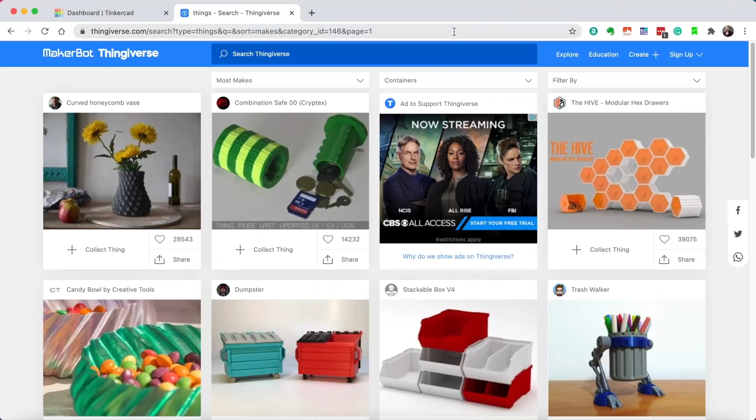If you go to the Thingiverse user interface, there is an item here that you can click on that will list categories. So I could go right to household, let's say to bathroom, and then I could find all sorts of accessories that I could 3D print for my bathroom. I could click on that again, and this time I could look at office organization.

And I could find accessories for those. But these are basically one size fits all. Whatever size the container is, that's the size I'm going to get. But there's another very powerful capability in Thingiverse.

I did a whole video on this last week that I'll link to above, so we won't go into a lot of detail here. But that is the ability to have customizable items. So if you go over to Explore and go to Customizable Things, you'll see that all the items listed here, let's look at this scoop, have a link called Open in Customizer.

Now, unfortunately, the customizer in Thingiverse doesn't work all the time. I don't know if it's a software bug, a resource issue, or a compute power issue, but it doesn't work all the time. But there's an alternative way to customize items.

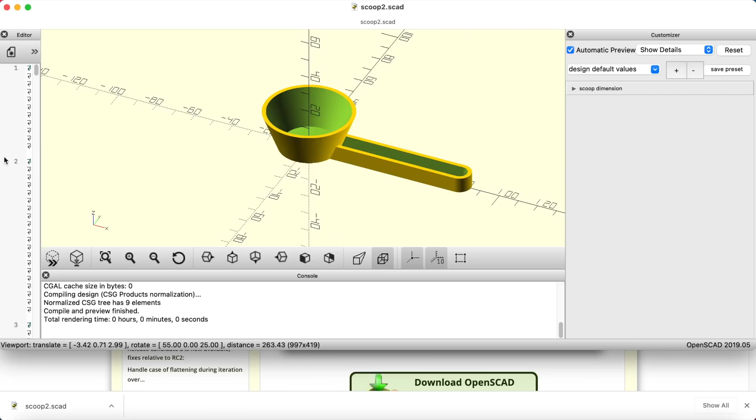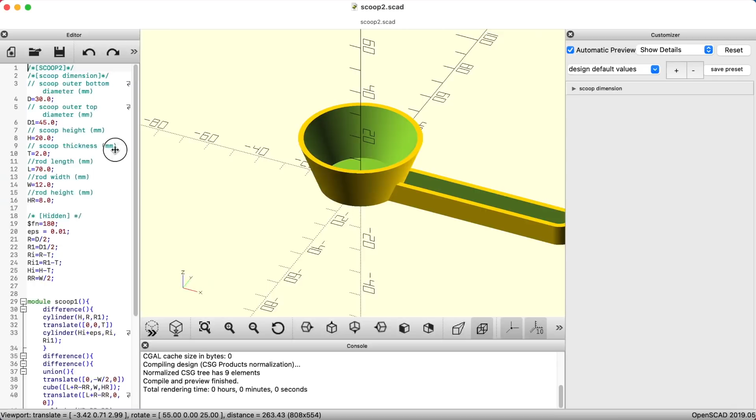Now, this is at first going to look a bit intimidating because SCAD is in fact a programming language. In the video I linked to before, I taught you all about this programming language. For today, all we want to do is drag this programming panel so it's closed, because we just want to look at this item here.

And we can scroll into the item with our scroll wheel on our mouse. We can use the left mouse button to rotate the item. We can use the right mouse button to move it around.

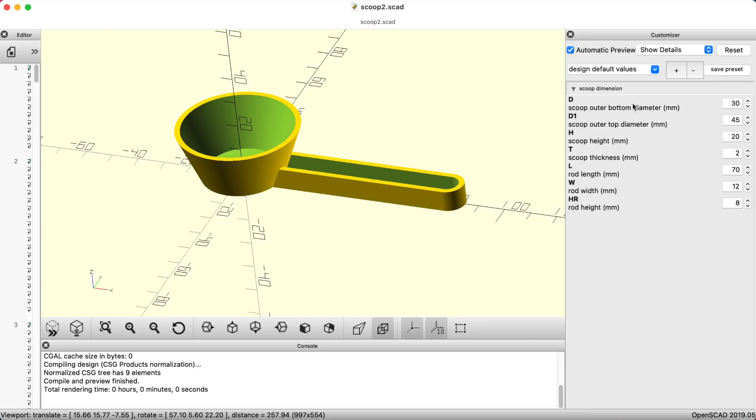Now you'll notice this panel over here on the right called Customizer. Well, that's how we can take and change our item. So I can make it bigger. I can change its shape. This is all customizable by changing these parameters.

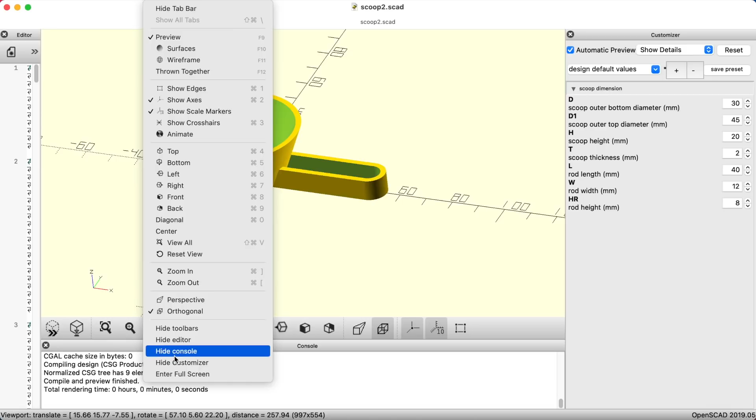Now, one important gotcha: you may not see that panel on the right-hand side when you first open up SCAD. And if you don't, click on the item called View in the SCAD menu and make sure Hide Customizer is not clicked. So if I hide it, it goes away. If I click on View and unhide it, it appears.

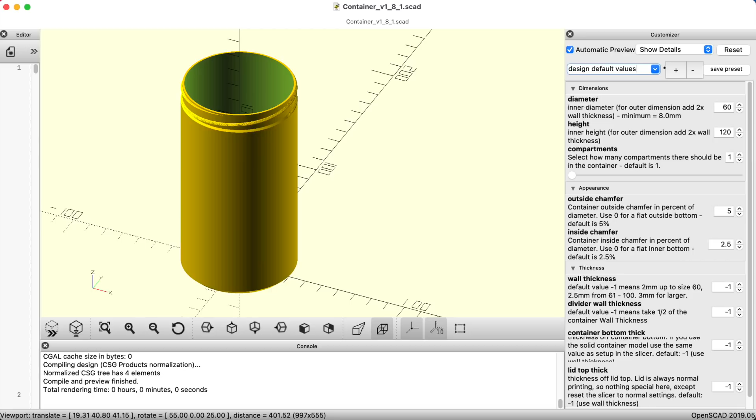And that's exactly how I produced this container. I started with a downloaded SCAD file and I customized it. That's how I produced this container. And you can learn how to do that in much more detail in the video I produced last week.

But now I'm going to show you how to design things from scratch yourself. Here is an example of a standard, more or less standard USB cable, a large USB connector on one end, a mini connector on the other. It might be a lightning connector on this end.

What I wanted to be able to do is put the large connector through this hole here. So it had to be large enough for the large connector, and then be able to wrap my cord around this cable wrap and put the small end through, and that would keep it from unwrapping. Very simple. And these happen to look sort of cool. They look like Batman weapons of some type.

So how did I produce this? Well, I produced it in TinkerCAD. So let's go to TinkerCAD together. Go to tinkercad.com, create an account, and then you want to click on Create New Design.

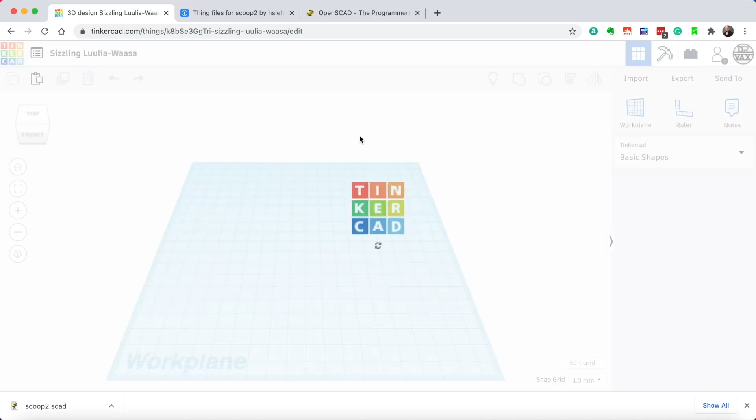Now, in order to design something, you have to think about what you want to design. You can get ideas by looking online, and if you were going to resell these, you'd have to worry about patents and things, but I think for personal use you're probably okay. So get some ideas by looking online, or just be creative, because it's so easy to try it over and over again. I'll show you an example of that in a minute.

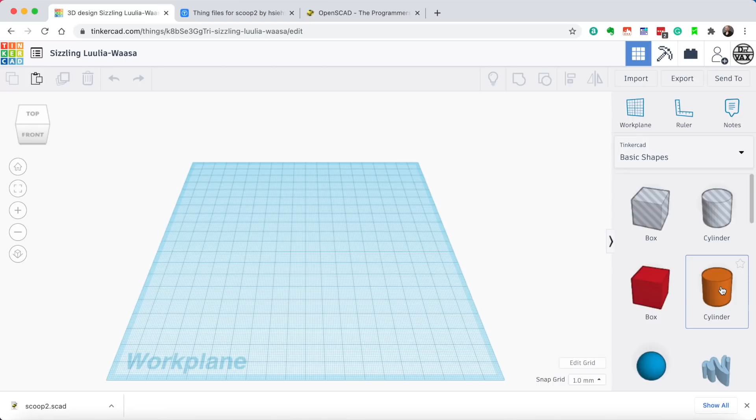So for this design, we're going to start with a cylinder. We're going to drag it over here. We're going to turn it into an oval. And then we might want to get a ruler out and get an idea of how big we want it. This happens to be about 75 millimeters, but get your ruler out and get a sense of what size you're looking for. So we're going to make this one a little bigger, 90 millimeters. And remember, we're going to need enough space for this connector.

And that connector is about almost 15 millimeters.

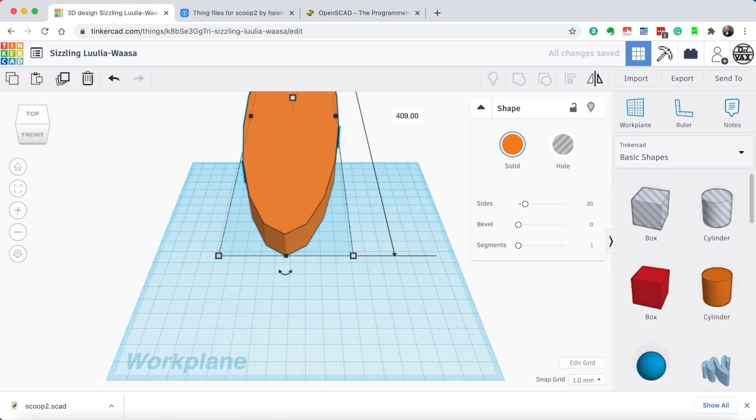So let's say we want the holes to be 20, we want some space around it. Let's make this other dimension 40 millimeters. Whoops, not 409, 40.

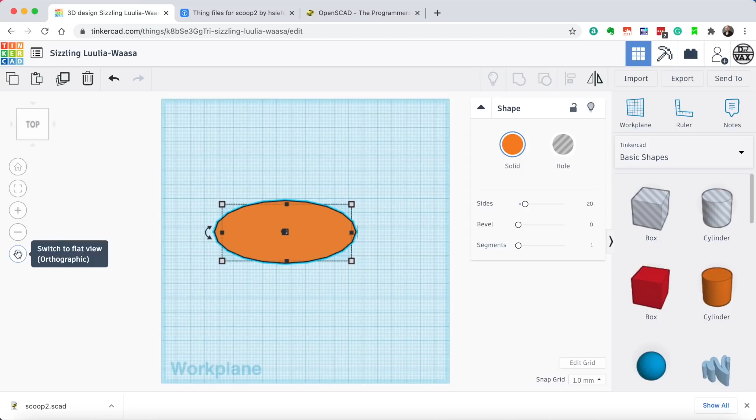Now I'm going to click on Top View. When you're looking at it from the top, or in fact from any view, you can look at it as a perspective view, a three-dimensional view, or what they call a flat view, which is actually an orthographic view. The orthographic views I find easier to draw with. You switch those by clicking here, so if it says switch to flat view, you want to click it.

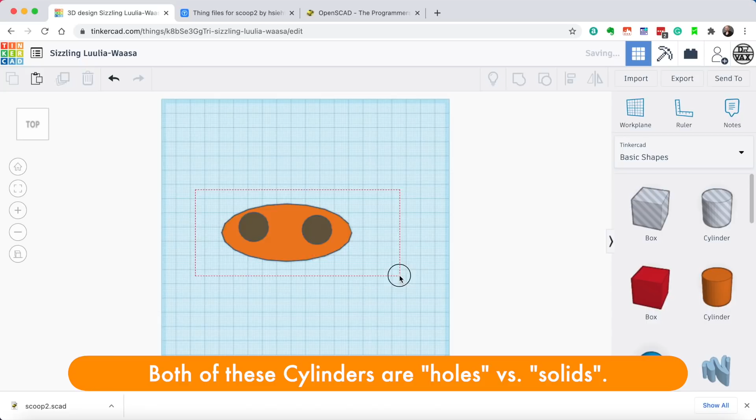Now I can just take another cylinder, which is a circle, and place it right there. I can take another cylinder and place it right there too. The next step is I'm going to select this whole item and click on this align button, then click this little button here to align them horizontally in the middle. So those are now aligned.

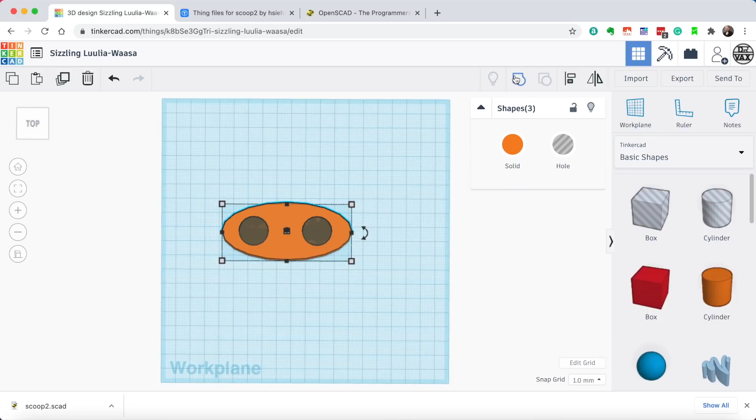Now if I take this and group it by clicking on the group icon here, it will cut those holes out.

Great. Now this would work, but I want to be able to hold on to the cable better, so I want some notches here. Now I could make those notches circular, or I could make those notches square. You can do it either way.

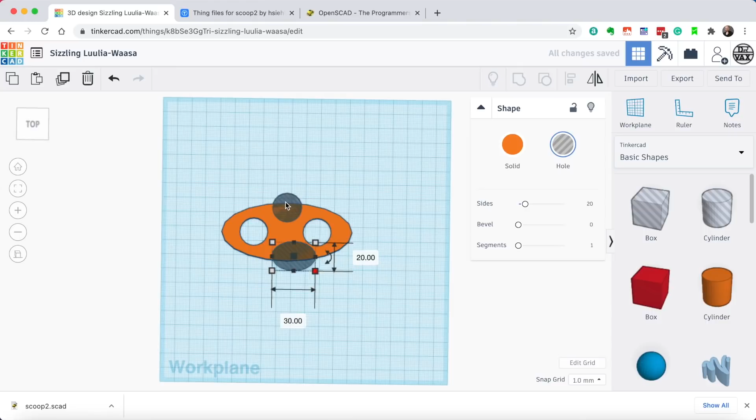We're going to make them circular, so we're going to drag a cylinder in here, and drag another cylinder in here. I'm going to make them a little bit bigger. We'll make that 30. We'll make this dimension 20.

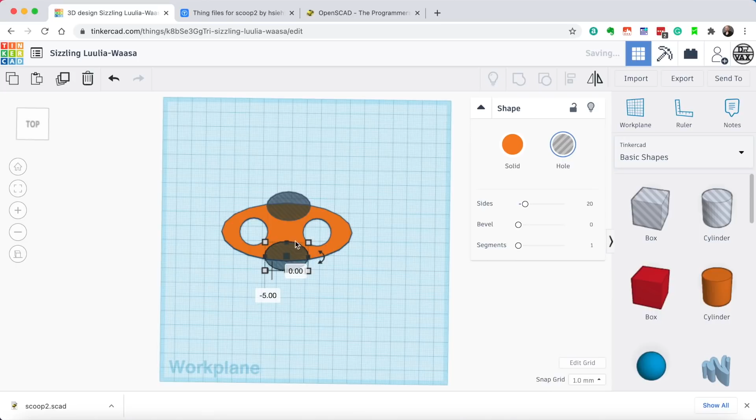Now I could leave them oval like this, or I could make it circular - that's really personal preference. If I select these two items by clicking and then shift-clicking, and then select this third item, I can use Align again, this time aligning them in this direction by clicking Align. Then group the whole thing together.

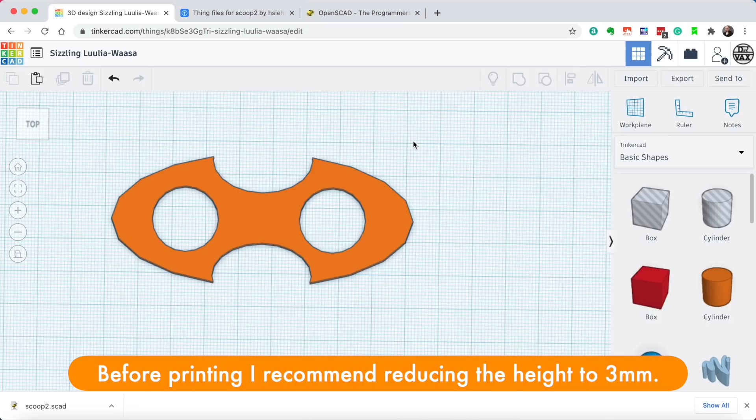We've now made a cable wrap, but if you look at it closely, you'll see the edges are not really smooth. The reason for that is, if I ungroup this and ungroup it again so we're back to the basic shapes, and click on one of the shapes, you'll see there's an item here called sides.

I want to increase that. That tells you how many line segments are used to make the curve. In the old days when computers were slow, you might have wanted that to be a smaller number, but we want to always just drag it all the way to the right. So we're going to go to all of these items and make the sides as round as possible.

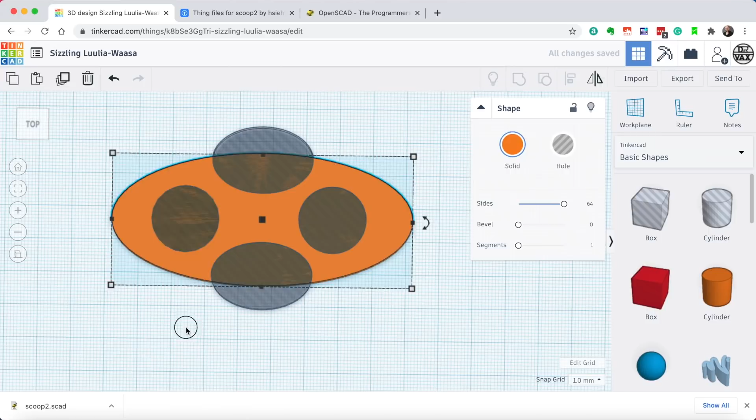Select that one. Now we're going to select this whole item again, and we're going to group it, and there you have it - your cable wrap ready to go.

Okay, now let's do something that's a little trickier. That one was really easy, and you get the idea that you can conceptualize things and make them yourself.

So I want this hook, and I'll show you this picture here of how I use this. It's going to go over the rod in my closet, so I need to know the size of that. And then it's going to hang a hat. So how do you make this shape?

Well, in Tinkercad, you combine shapes together. I have a playlist here with a whole bunch of different Tinkercad examples you can look at. But for today, we're just going to keep it simple.

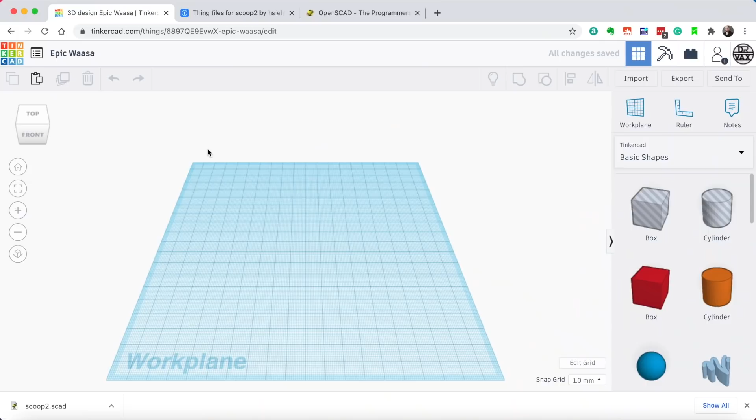So let me go back to the beginning here, and I'm going to click on Create New Design again. We have to think about what this is - well, it looks to me like it's a couple circles that are cut off. There are lots of different ways we could cut off circles.

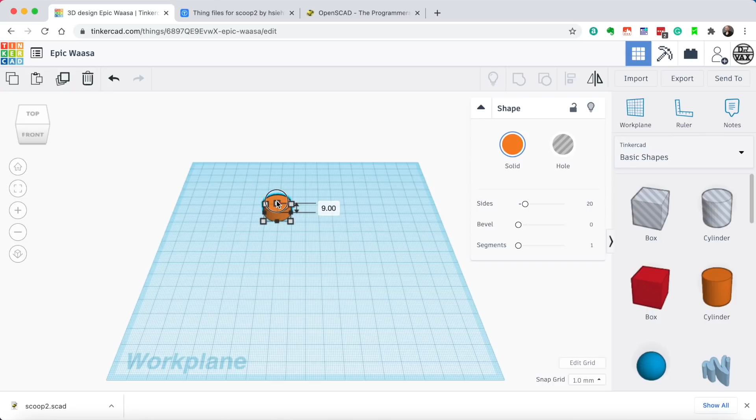So let's start with a cylinder. How big should this cylinder be? Well, first of all, we're going to reduce the height because we don't want this to be really tall. So let's make it, I don't know, 10 millimeters.

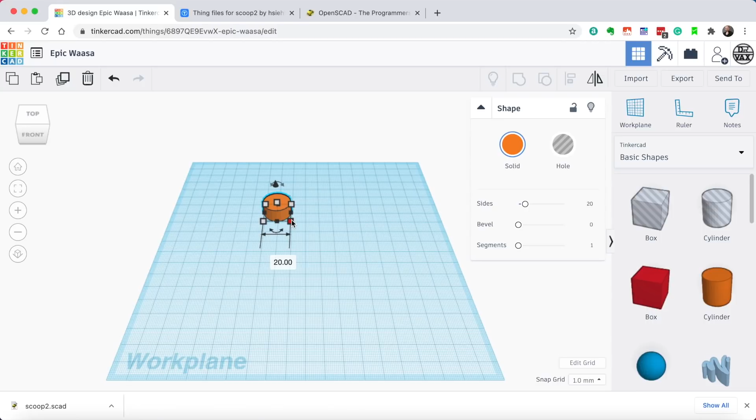Then we have to go into our closet and measure the diameter of our closet rod, and we want to make it a little bit bigger so it'll clip on there nicely. So let's say, for argument's sake, if I look here at what I actually ended up with, I got about 30 some millimeters. So I'm going to make this 30 by 30.

Now, one of the things I have to do is hollow this out. So how do we hollow this out? Well, before we do that, remember we're going to increase the number of sides so it's rounder.

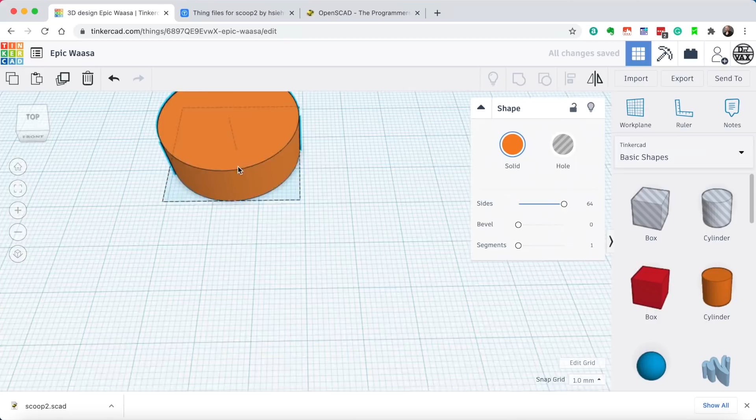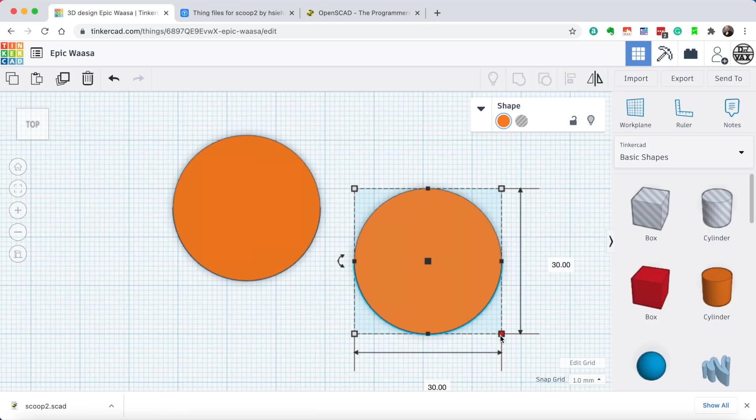Now if I hit Command D or Control D and make another copy of this shape, I can make it a little bit smaller than my original shape. The original shape is 30 by 30. So if I want the walls of this hook to be about 3 millimeters, it looks like about 3 millimeters.

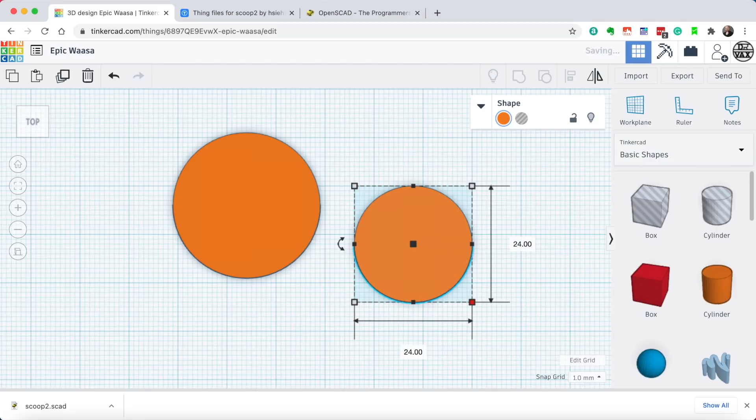Then I need the inner circle to be 6 millimeters smaller, 3 millimeters on each side. So this is 30, let's make this 24 by 24. And now I can switch this by clicking on this icon to a hole, and drag it in the middle.

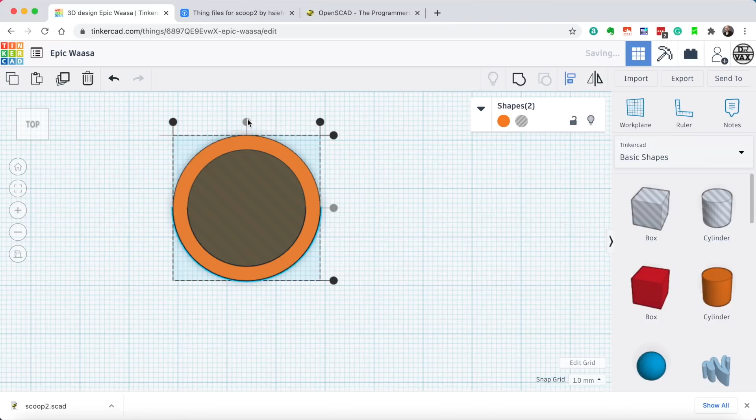But how do I get it exactly in the middle? Well, I use my old friend Align. I select them both, click on Align, and align on this dimension and this dimension. Then I group them together, and now I have a ring. That ring is the beginning of this model.

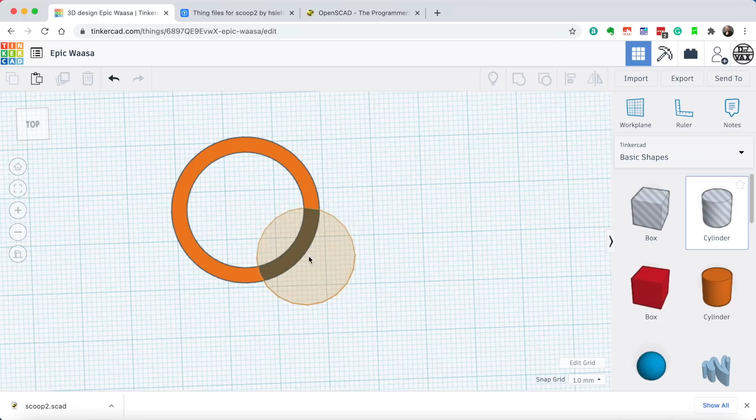Now, how do I get this part cut out? Well, I take any shape I want, a circle here, and overlap it on that ring, just like this, until I get about the shape I want. The key is that I want this part to be on the vertical axis and this part to be a little bit over. So we actually have to make this circle pretty big here to get that aligned the way I want.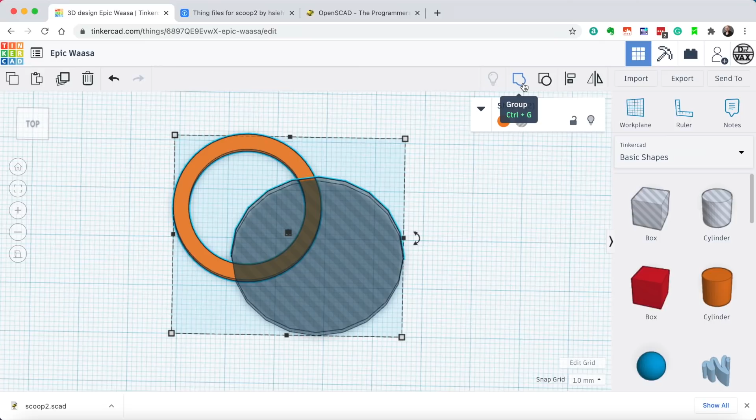So I select these two items now, and group them, and now I have one part of my hook. Well, what is the other part of the hook? It's the same thing flipped over. So Command D or Control D will create another copy, and I go to this icon called Mirror, and flip it on this axis.

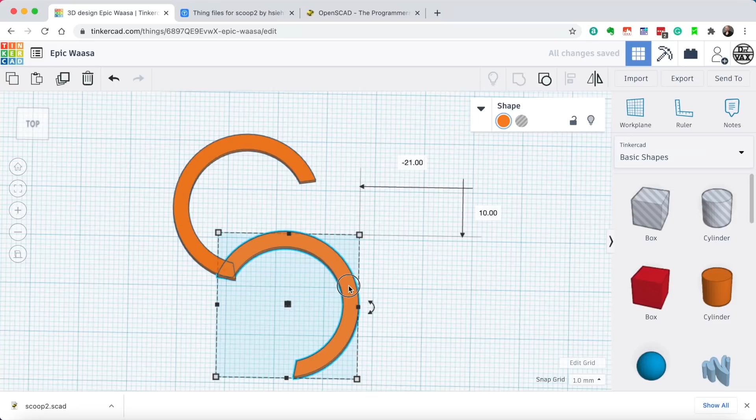And I position it down here, but that's not quite right. But I can rotate that around until that just fits. Sometimes it's a little tricky to align these things. Let's move this up here, make it a little bigger.

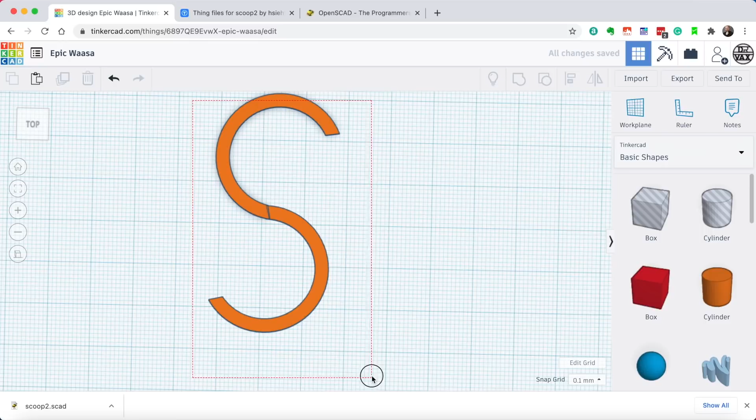So I can go down here to Snap Grid, see this in the bottom right-hand corner? I can turn that to 0.1, and then move this even more finely until it aligns. I can select these two items, group them together, and we have our closet hook.

So producing items is really all about conceptualizing them and then assembling them together. Let's conceptualize this item for a moment. What is it? Well, it's 2 cups. We've learned how to make hollowed out items by putting a hole inside another hole. In this case, the inner hole doesn't go all the way to the bottom.

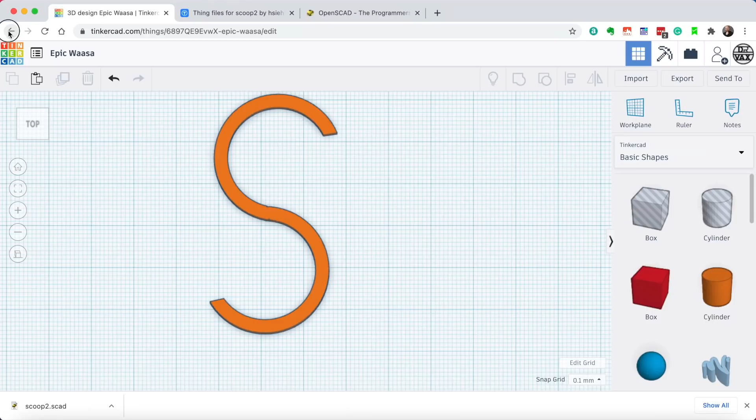And then I just dragged a rail behind it and assembled them together. So let's look at this completed model for a minute together. We'll look over here and say tinker this.

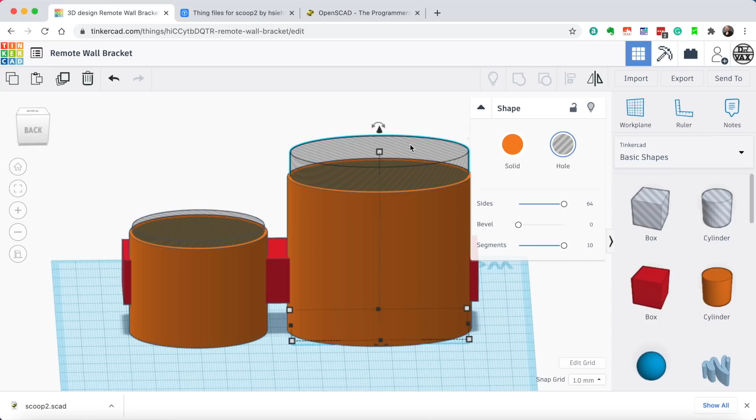And I'm going to select this model and ungroup it. So you'll see here we have an oval container and then another oval container that was pulled up a bit. That's how we created the base. Then we have a rod on the back. When we assemble these all together and group them, we end up with this wonderful shape.

Now, how did we know how big to make it? Well, we could measure this, but because it's an oval, it's a little tricky about getting the dimensions right. When you print small things on 3D printers, it's really fast. So you want to decide how big this oval should be? Make a 1 millimeter or even a 0.4 millimeter, 2-layer height oval, print it on your printer, and make sure it's going to fit.

So producing wonderful items consists of either downloading SCAD files and using OpenSCAD to customize them, and in the video from last week I showed you how to do that in a lot of detail, or using a computer-aided design program such as TinkerCAD or FreeCAD to design them from scratch. For today's models, because precision wasn't important, I used TinkerCAD, very, very fast. If I needed something precise, I would have used FreeCAD.